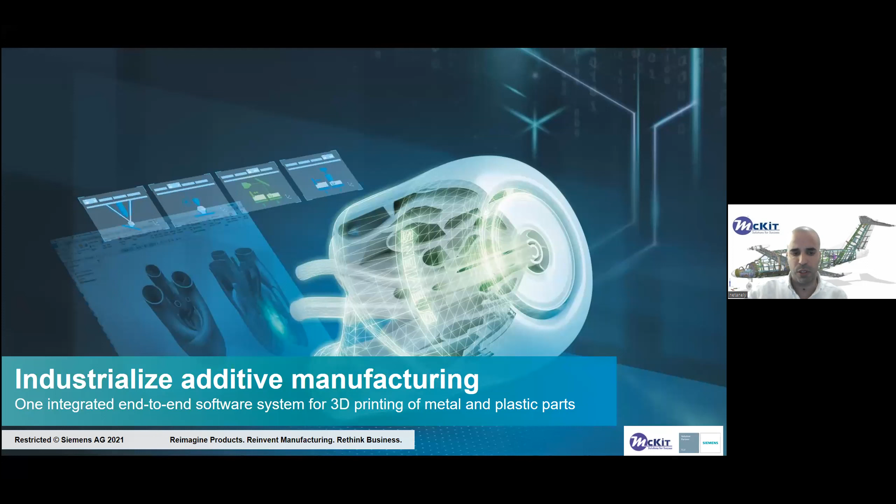This is a real solution that takes place in one system end-to-end. It starts with design for additive manufacturing, continues with simulation for additive manufacturing, and ends with the production of the additive manufacturing at a lot of machines. We will see it.

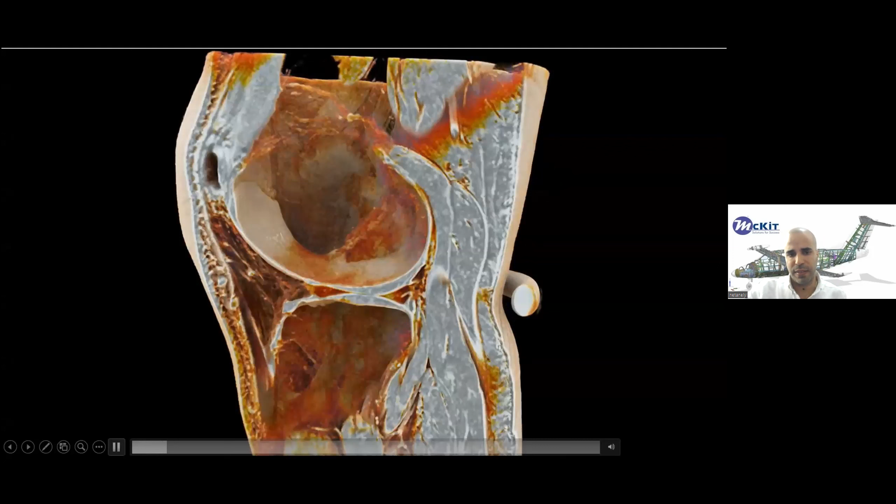I want to start with a simple use case that shows the capabilities, how we start. I'll stop it for a minute. How we start to get the data, how we deal with the data, and how we can prepare it for simulation, prepare it for the additive process, and how we produce it. I want to start with this, and then go to the agenda, and we will continue.

So what we are seeing now is a bone that was scanned and brought into NX. This is the bone, and this part was designed in NX. This will need some fixture on the bone, probably titanium.

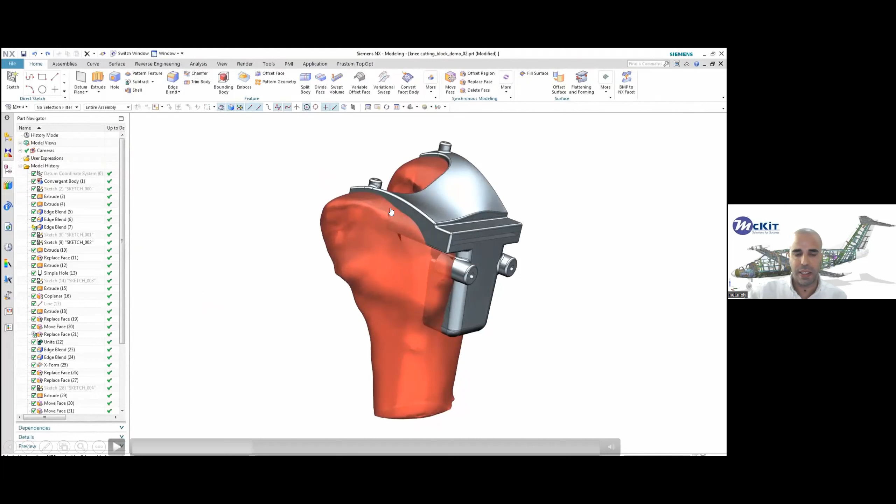In a few seconds you will see that NX naturally performs operations with scan data. This is scan data that doesn't go through any reverse engineering process. With a click of a button in the system, we will see what happens here. This is called convergent technology, and we will discuss it.

The operation you saw is a Boolean operation called subtract. With a mouse click, we perform subtract from the scanned bone, which came in as STL and some other formats. With a mouse click, the subtract happens.

Now we can see the continuation of the process. We are putting the part on the build. If we need to generate support, this can also be achieved within NX - a right click and we generate the support. In this specific case, we also call this the EOS print, printing titanium.

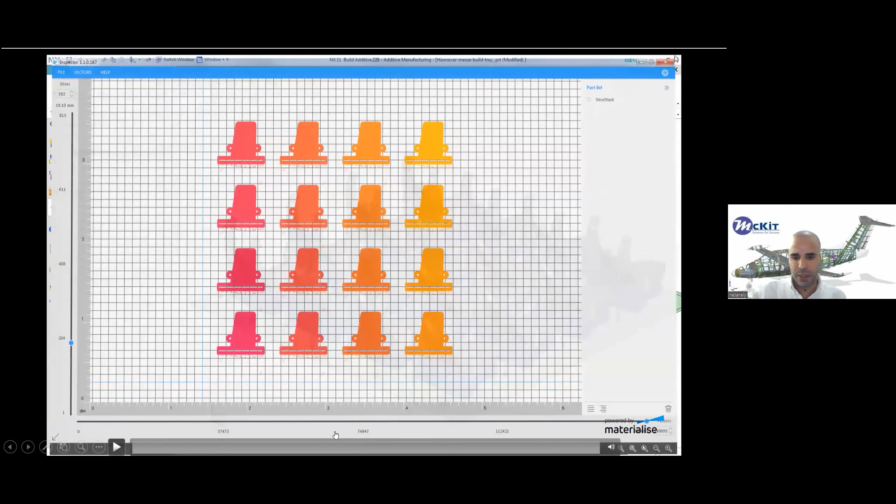We can see that we can review each layer and check for issues, then go to print. So what you saw here was a full process that starts in NX and ends in NX.

So this is the agenda for today, what I've prepared. If you're interested after the session in more details, for a deeper dive on any topic here, feel free to call me through Gershon or directly, and we can do this deep dive.

We will talk about the challenges and barriers we see in additive technology. We will see the industrial additive manufacturing solution, the Siemens solution. We will go through the design for additive manufacturing tools and capabilities that Siemens proposes. Then we will go to the second level, simulation for additive manufacturing, and finalize with 3D printing itself - how to prepare the build, do 2D and 3D nesting, and how to build the support. This is the agenda for today.

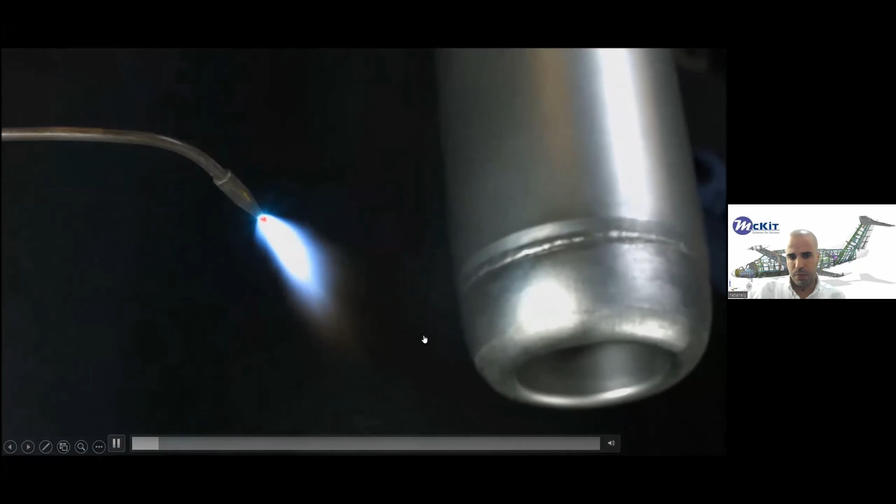I also want to share this movie with you. In this movie, we can see metal parts, metal components that go through a very harsh warm process. Meanwhile, in parallel, we can see small parts with the same material that also go through the same heat process. We see that the small part gets red, while the component with the same material doesn't get warm.

How is this process achieved? You can see this in the project. I talked with Gershon, and Gershon said: present a problem and then present the solution. So this is one of the projects that can be discussed.

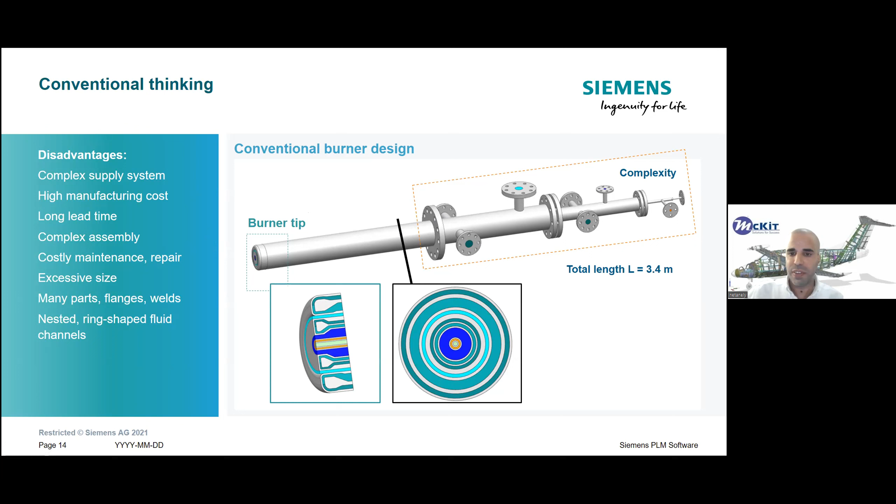The problem here is that the conventional thinking of the system is a very complex assembly. The production of this assembly is very hard - you need to weld parts, produce every part on its own, do an assembly, do a weldment process. This whole chain takes a lot of time and a lot of place, and it's also a very large system.

What Siemens provides here is a new way of thinking - moving from conventional thinking, conventional manufacturing process, to a new process with additive manufacturing.

Perform simulation of flow like you see here, simulation of topology optimization, simulation of design space, and then you can go and seek for the optimized component. As you saw, Jack is putting his hand on the material after a few seconds and it doesn't get burned.

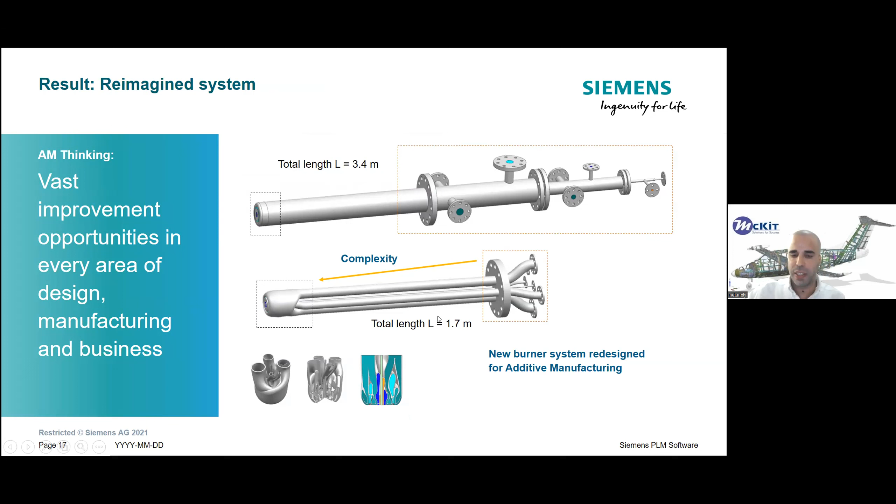So this is the end. In the end, you can see this was the dimension before, and this is the dimension after. And of course, we have reduced in weight, we have reduced in lead time, we have reduced in weld process, and we accelerate everything in every area.

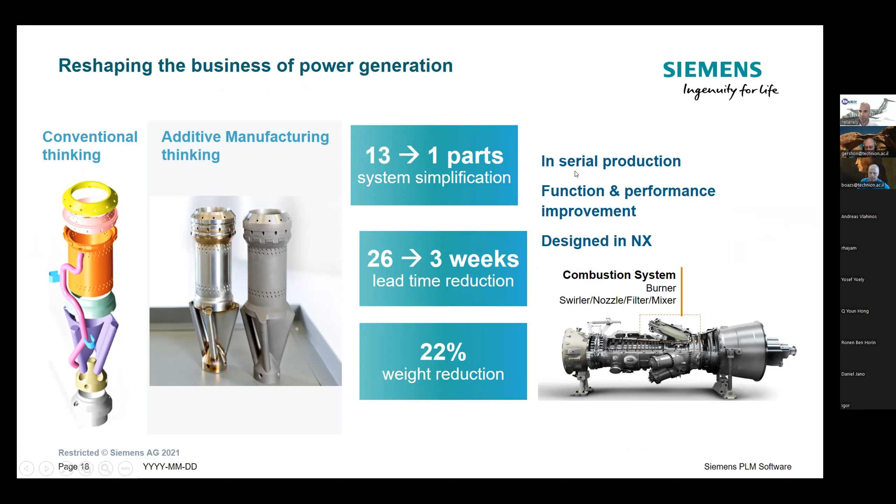What you are seeing here is a serial production. It's not some prototype or a fixture and so on. It's a real product that is in serial production. And of course, as we say, the overall function and performance was improved, and all of this was designed in NX.

Okay, so if we are talking about additive manufacturing and what is driving it, we can say it's about these two vectors. The first vector is the Y direction. We need to reimagine products. We need to think new, and don't think about technology that gets us to think as we thought until now.

We can scan to product, and this is the first movie we started with. And of course, we can expand the performance with simulation capabilities. And of course, the cycle of development within the production is getting very small.

Also, the manufacturing. If we are speaking about additive manufacturing, we eliminate the old processes like molding, like casting, and of course the cost of tooling for this process that costs a lot, and the NRE that we need to invest, it's very high. This process we eliminate if we are thinking about additive manufacturing. Also, we eliminate and simplify the assembly process, as you saw in the example that I showed before.

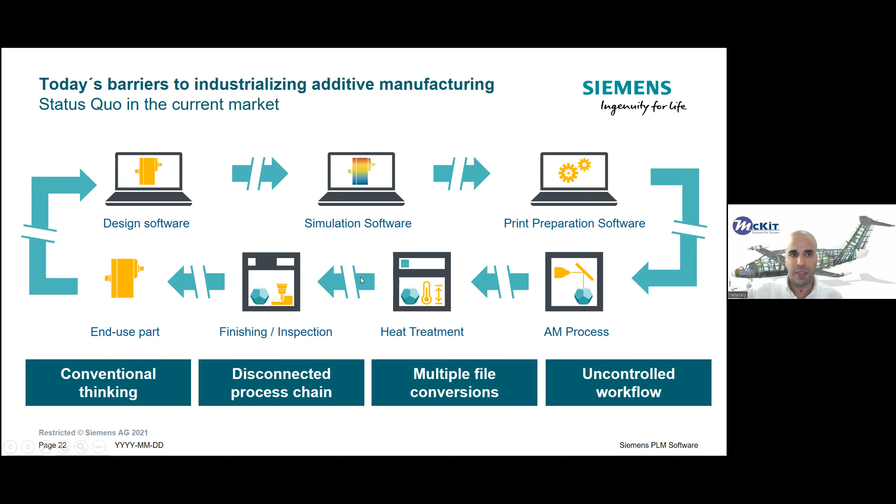And also, if we are not losing data, we are losing the ability to act fast for changes. So if the design changes, this whole process needs to take place with these several systems, and the whole chain starts from scratch. So for example, if I transfer a new design to the simulation software, you will need to do the meshing again, you will need to do all its capabilities from scratch. So this is one barrier that we are seeing.

The second is related to the additive manufacturing process itself, and these are the challenges. The challenge is to get accuracy in the printing. The challenges are recoater collision that we are seeing on the shop floor, local overheating of parts, build failure, of course, building effective support. How do you know in advance that the support you build is effective, and also how to distinguish ahead of time microstructure and defects in the parts. So these are the barriers that we're seeing.

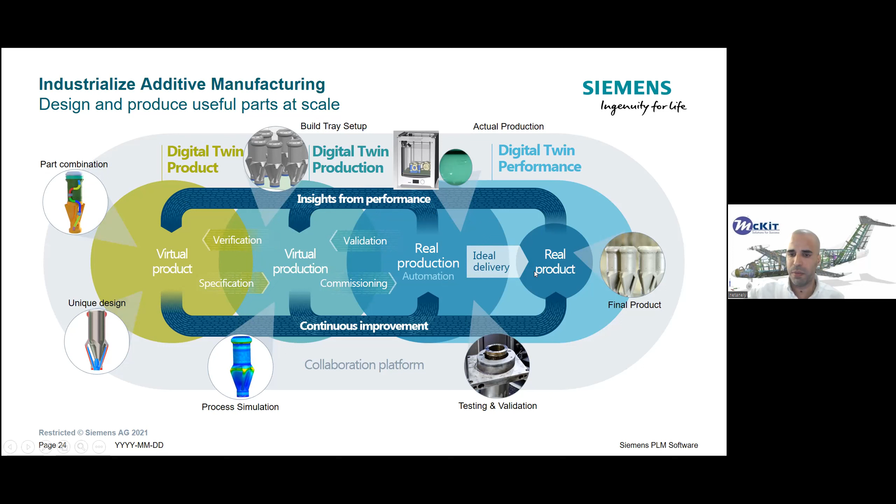What Siemens is suggesting as a solution for these barriers and challenges is digital twin thinking, the digital twin solution. That means in general that we are building a digital twin for the physical twin. The physical twin is here at the right, and the digital twin is at the left. So we are starting at the CAD, we are going to the CAE capabilities, and after we are very satisfied with the process and the phases, we can do a real and strong handshake with the shop floor and deliver products that can be printed with first-time accuracy.

Siemens does it with the leaders of the additive manufacturing community, like DMG Mori, HP, EOS, Electroimpact, Stratasys, Trumpf, of course, Materialise, and so on. Siemens is also building a hub. If we have time at the end, I will also show you something that Siemens has been working on very hard over the last few years.

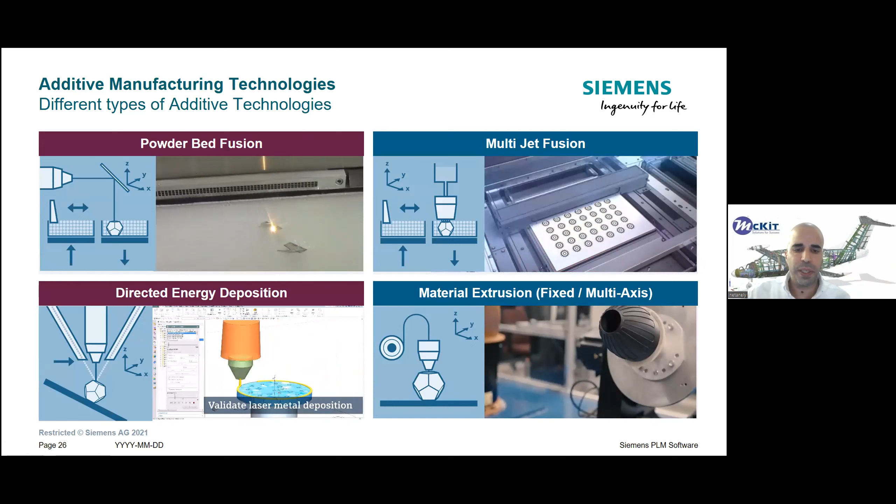Okay, and the main technology that we are supporting is of course powder bed fusion. We also call it printing in 3 axis. Also the multi-jet fusion that you are seeing here on the top is a 3 axis technology. So we are supporting this technology. And at the bottom of the screen, you can see 5 axis printing, like directed energy deposition, and also material extrusion. As you see here, it's also a 5 axis solution. All can be achieved from one system end-to-end. Okay, I will skip this and dive into the first layer that I want to present.

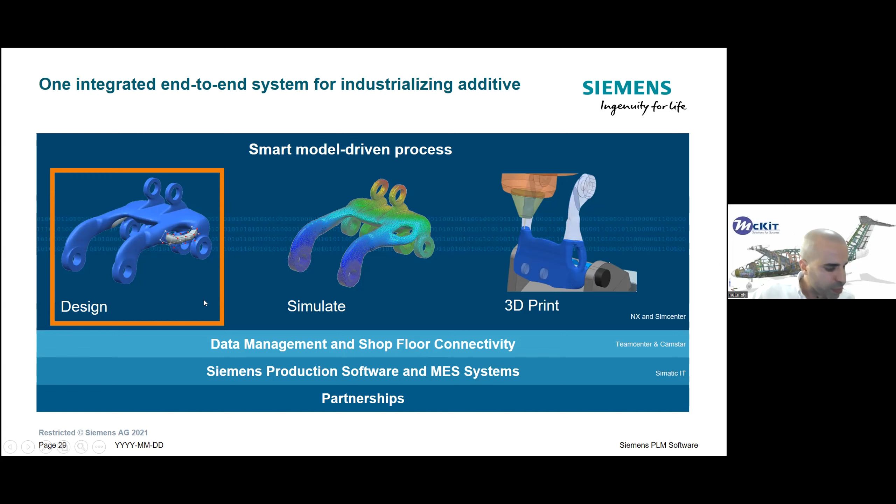As I said, we are suggesting a full end-to-end solution from the design through the simulation to the 3D printing. And this is what we are going to see. What are the tools that help us achieve these goals? From the design aspect, we have a lot of tools to import and do the preparation, so they can help us print watertight parts at the end of the day that will print well. The second is design with convergent modeling. I will present the convergent modeling technology, a trademark of Siemens, and explain what it means. Of course, lattice structures, what we can do with lattice structures in NX, and also optimizing lattice structures.

The next will be design rules for manufacturability: how we can check that the parts we designed for 3D printing can be produced. And we will also see the capabilities to use topology optimization in NX. I will focus on topology optimization for the mechanical designer. We also have capabilities for the simulation engineer, but we will focus on the mechanical engineer aspects.

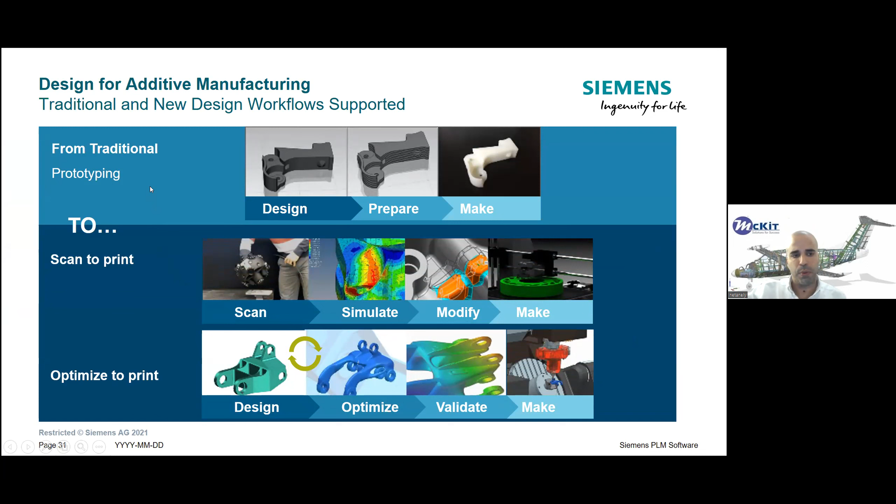So before we dive in, just to know that we support the whole workflow for printing, starting from prototype, where you have a simple design, you want to prepare it for printing, and you print it. The second process is what we call scan to print, which I started with at the beginning of the presentation. We can scan parts, import them into NX, take them to simulation, modify them very quickly, and also prepare them for printing and print them.

And the last workflow is where we take parts that today are designed with conventional thinking, like we saw at the beginning of the presentation, and optimize them so they will be more lightweight from a mass standpoint, and also more robust for the process. So we support all these workflows in the 3D printing area.

Okay, so if we are looking at the first tools, the set of tools that can help us to import and prepare parts for 3D printing, we are speaking about capabilities of NX to work directly with geometry from legacy systems. We can read topology optimization from other systems. We can read CAE or scan data.

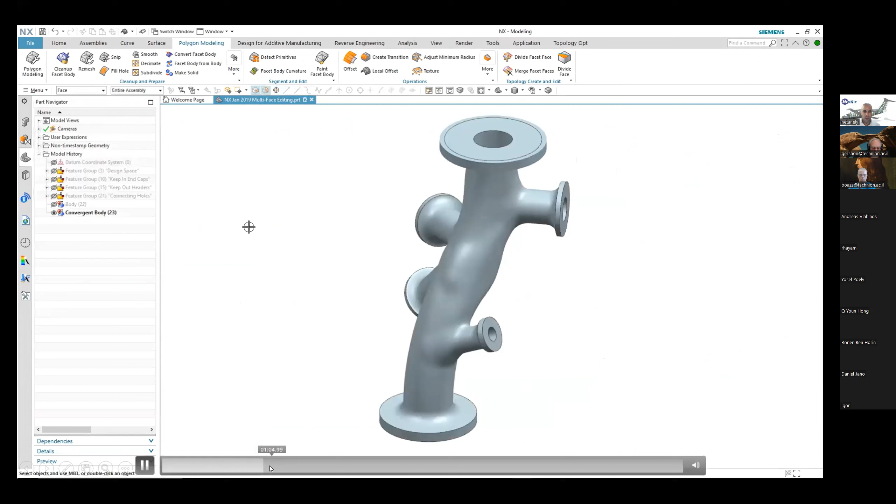And I will make the movie go faster, and you can see very fast changes to mesh data. So this is what you see here. It's polygon modeling. We are inside of NX. We get something like STL.

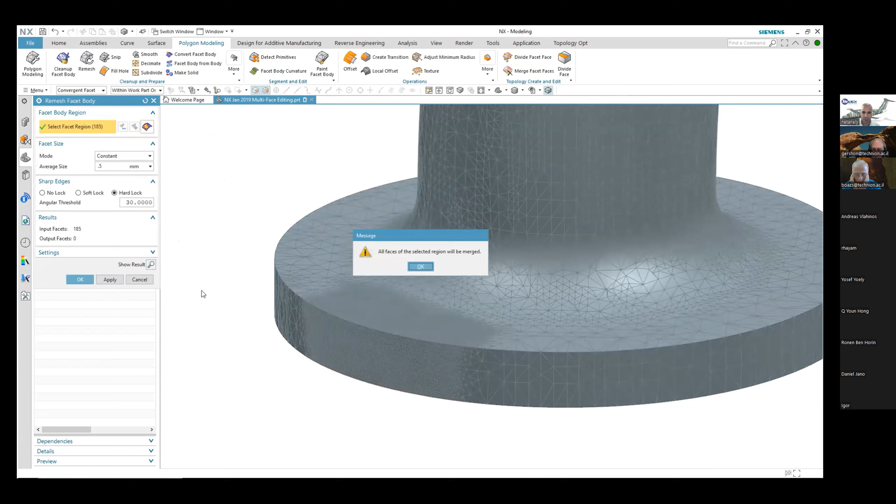And for example, if we do a remesh, take this whole area. This area is maybe more important or less important. We can control the triangles. And for example, here we want to say that this area is more important, and we want to remesh it to finer elements. And as you see, click a button, and everything is fixed.

Okay, another capability in the same concept is to divide face. Again, select an area. You can use the brush. This here is a rough brush, and you can say this area I want to divide because this area is important, and I want to close it with surfacing, do a NURBS surface, and so on. And then you see the face is divided.

We are working on a convergent body. When we are getting a part, STL or OBJ or something like that into NX, we are doing a transformation to a convergent body. And now, you can see, we can simply do holes. Holes are a native operation of every CAD system, and also of NX, of course. But what you are seeing here, I want you to understand it: we're doing a native operation from the CAD system, from NX, on non-native data and mesh data, very easily, as you see here. It's thanks to the convergent modeling technology.

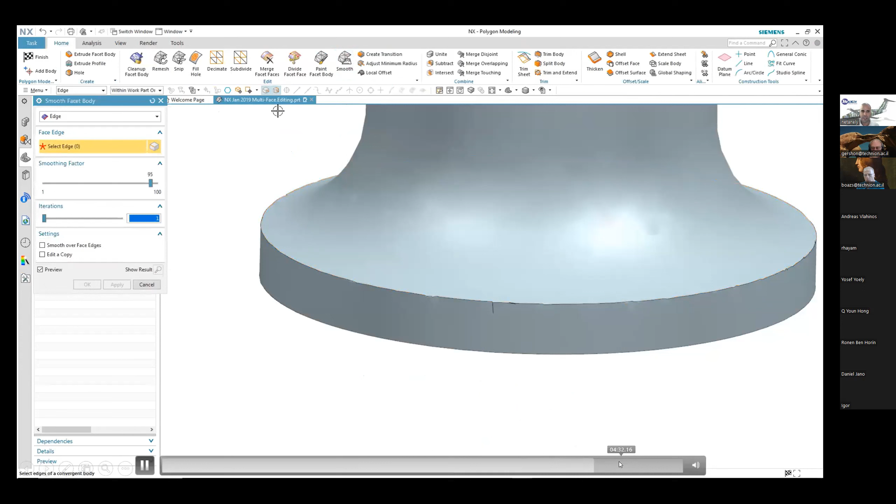Okay, this is direct editing, and I think you understand the point that we can very fast fix data that came from other systems or from within NX. Another capability I want to show you, this is also a new capability. We can take 2D data. What you are seeing here is 2D data spread on a UV grid, and we implement it on 3D data. So we tell the system, take this 2D data, put it here, please. You can see on what surface the system is doing it, and do an offset for us.

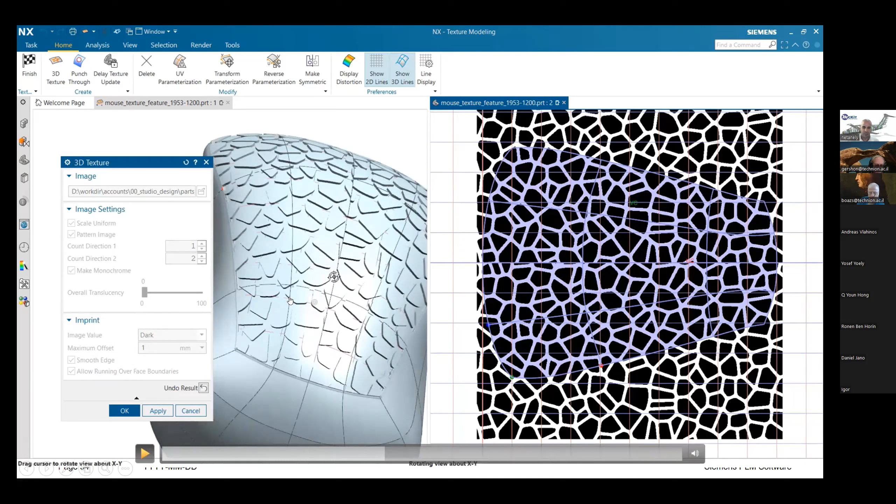In this example, 1 millimeter, and the system will complete it. Okay, I also will run it. I want to show all of the most important capabilities. Another capability is to define and to validate the data that we get.

For example, we get data, we get the scans, it's STL. We are running a simple check here, telling the system, please find us what is not good with the scan. And we're getting it with a visual notification. So we can take this geometry, we can run a plug leakage test, and ask the system to let us know from where we have leakage.

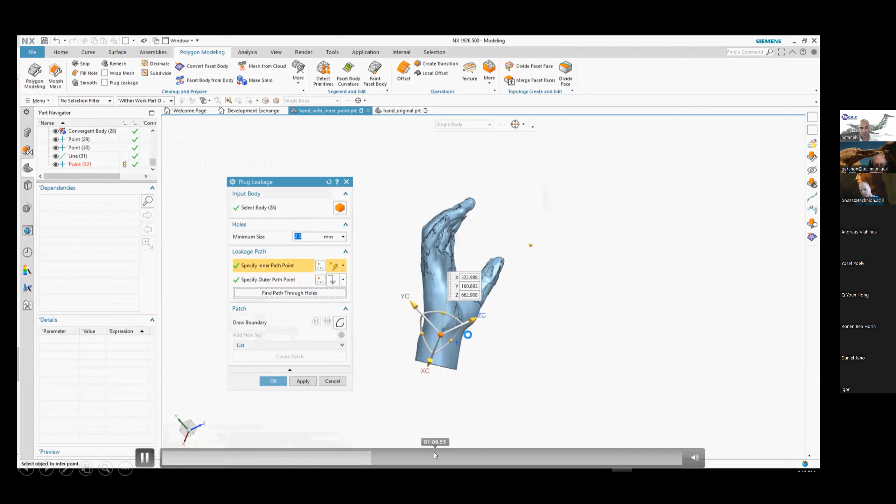So the system will run the analysis. And the system shows us visuals here. You have a leakage. The leakage was defined by 2.5 millimeters. And of course, we can define whatever we want. And on the fly, you can see here the repair. So on the fly, we have the same function, patch. We can do the draw boundary function and very, very easily close these gaps.

Okay, of course we can do the check again, the plug leakage, and see if we have another leakage, and if not, we can go to production or continue with the part to the next level.

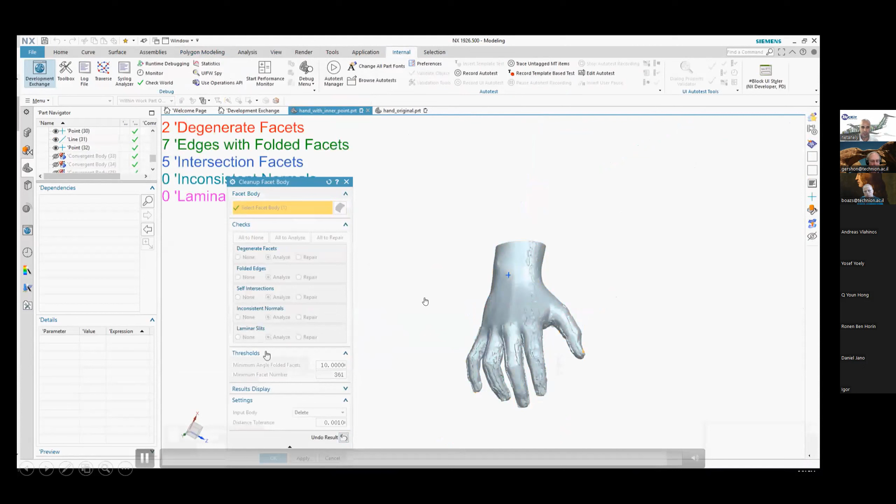Okay, the next topic I want to discuss with you is the convergent modeling technique of Siemens. Convergent modeling, as you saw from the previous slide and movie, has the ability to work directly with faceted surfaces. Also, we now have the capability to combine faceted bodies with precise geometry, as you saw here.

Why do we need these capabilities? Because this area, for example, is a very precise area that after the printing needs to go for machining and get an accurate tolerance. So after the printing, we will take it to machining. If this whole body was a mesh, we would have a problem doing the machining here.

So in advance, Siemens gives us the capabilities from the topology optimization, which you will see in a few seconds, to generate these parts that involve mesh scans and precise geometry. And as you saw earlier, we can also take this convergent body and do a Boolean operation like subtract. We can do a Boolean operation of unite.

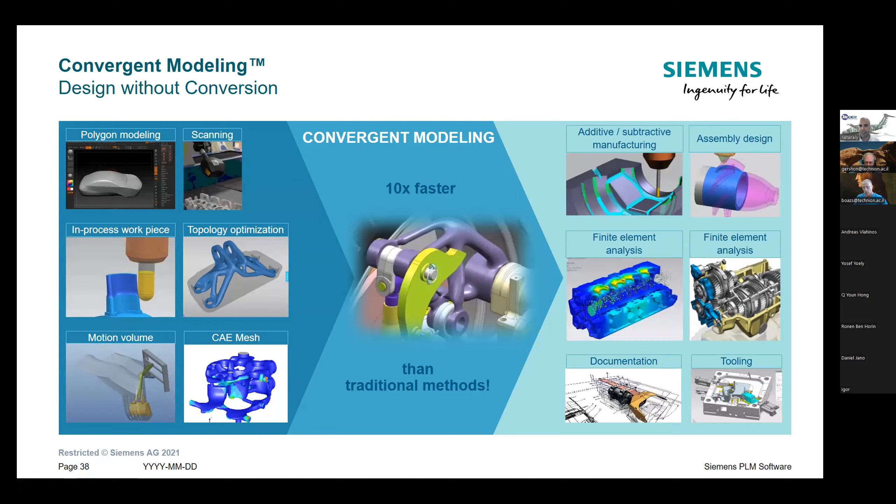And what is also important to understand is that we can take the result of the convergent bodies and continue with them to the next steps, like simulation, finite element analysis, assembly, tooling, documentation, drawings, and so on, and motion volume capabilities. This technology is implemented very deeply in all Siemens products. And of course, if you want, you can export it by STEP 242 and get it to any other system.

Okay, so I want to show here one more example of how we deal with this convergent body. This convergent body also came from a topology optimization. Maybe the topology optimization wasn't so refined in this area, and the designer wants to take this area and make it finer, more robust. In a few clicks he is doing his design, using an advanced capability of NX called Realize Shape. He can control the geometry, like you see here with the cage.

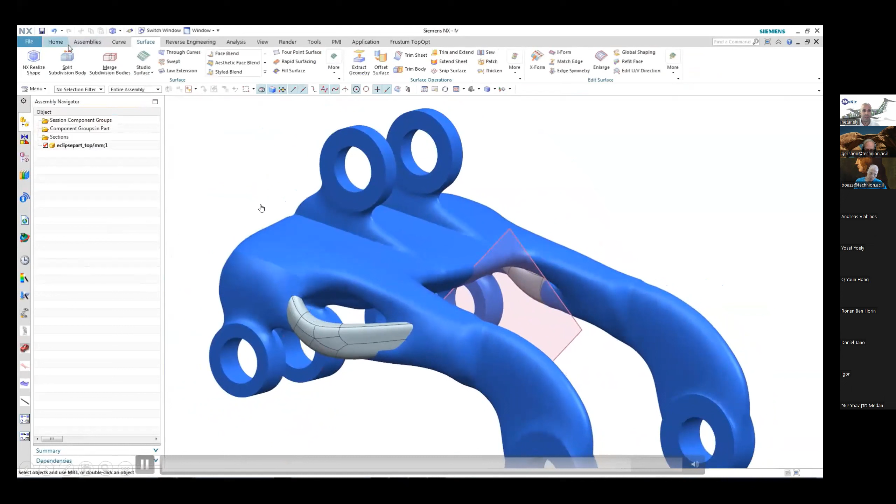And after he is satisfied with the design, now we can say very quickly, please unite the convergent body to the design that I made, and he has a new design. Again, without reverse engineering. Without reverse engineering, this can proceed to the next stage.

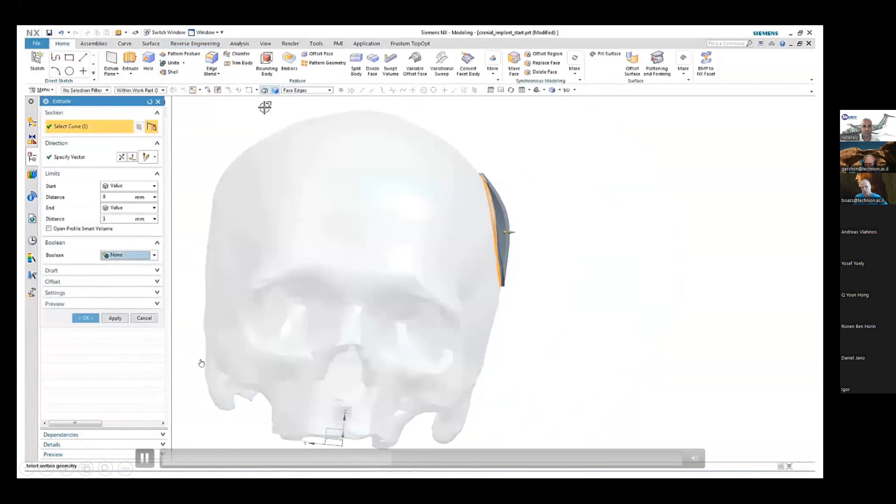Another example of a convergent body is this example that was also scanned and brought into NX, and you can very quickly do a patch on this area and continue working with, again, native NX tools like extrude, like remove material, very fast. And of course, everything is associative during the whole process chain within the CAD, the CAE, and the CAM. Okay.

The next topic that I want to speak about today is the lattice capabilities within NX. Lattice is used for lightweight components and also for structural integrity. So we are seeing these lattice capabilities, with 3D printing, taking more place and more account. We can do complex geometry and replace areas that are not functional with lattice very quickly. So this is the problem. Okay, yes, to get a more lightweight component, and this is achieved with lattice capabilities.

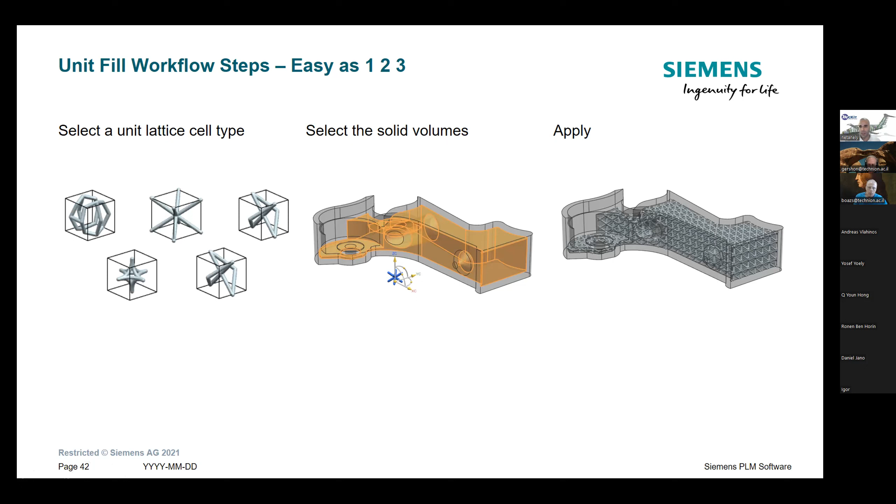In NX, it's very easy. It works like 1, 2, 3. You need to select the unit lattice cell. Second, you need to select the solid volume and apply what you want. Let's see an example. So we call the lattice.

We select the geometry that we want to be filled. This is the function we are calling Unit Lattice Cell. We have something like 15 out-of-the-box lattices defined within NX, but of course we can also create a lattice. I will show you in a few seconds how we can do it in a very complex way. Of course, we can control the randomize, the rod diameter and other aspects.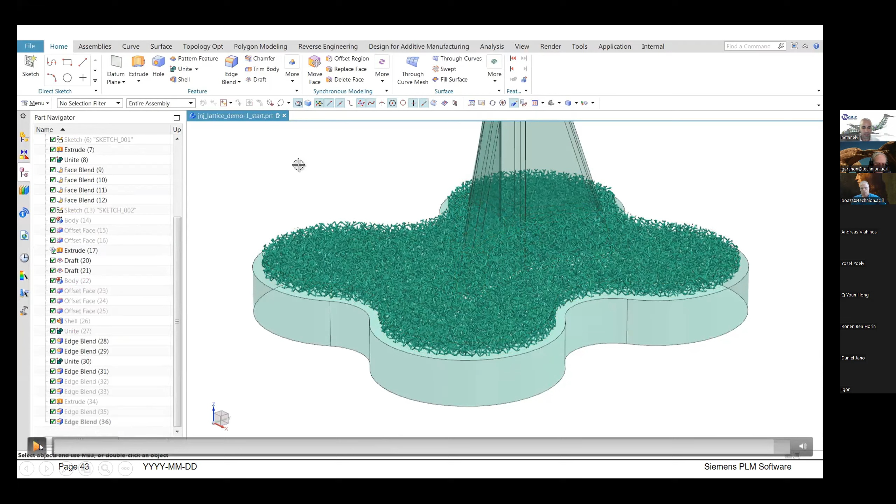What is also important to understand here is that the result of the lattice is also a convergent body. So we can transfer it to manufacturing as separate bodies. NX works natively with multi-bodies. Not every CAD system works natively with multi-bodies; in NX, it's the architecture to work with multi-bodies. So this is one example, and of course you can see a real example from the industry.

I want to show you other capabilities of the lattice. The lattice in NX takes place in two manners: it can take place on a surface, and it can take place on a volume. What you saw in the last movie works on volume. Now we'll see an example of a lattice on a surface. So we select the face, we define the parameters, and we get the lattice.

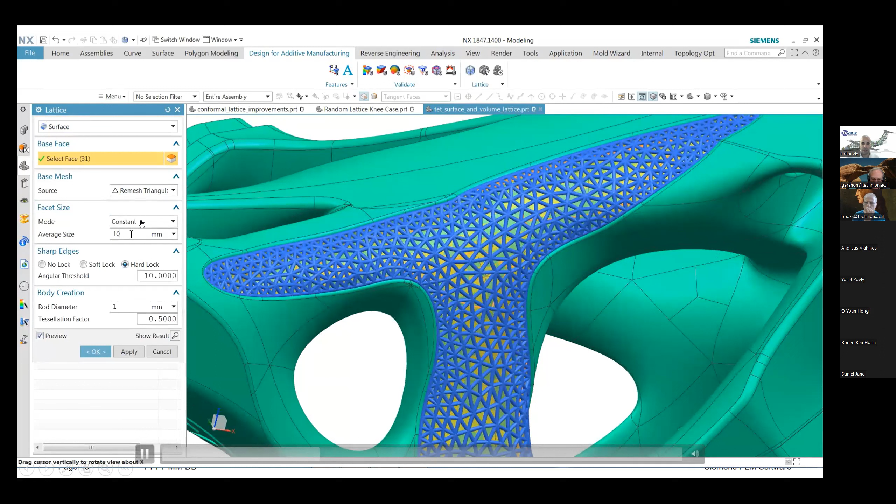If we see that the convergent lattice is not so fine, we can do a simple remesh, and the system will calculate. We can do a constant, we can do a variable, and the system understands the geometry, and according to the geometry, we get answers.

This is a surface lattice, and another capability is to do a tetrahedron fill. This also works on the volume level, and you will see immediately what is happening here. It takes more compute time. What you are seeing here is real compute time with no manipulation of the movie. And this is what we achieved.

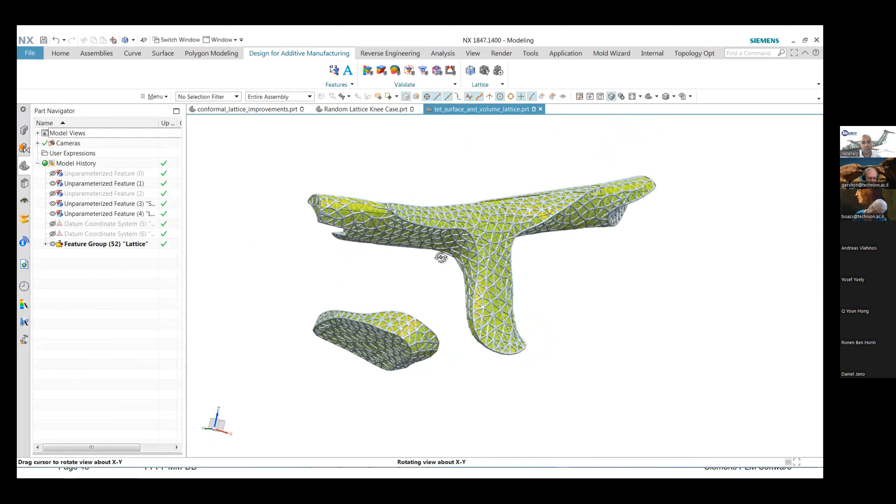Now we will hide the geometry and see only the lattice, the volume lattice, the tetrahedron fill. This is what we get. And of course, as I said, we can leave it as a separate body. It depends on the manufacturer. Mostly manufacturing likes to have it separately because they have a different definition of the lattice. But we can also do a simple unite as you saw before. And this is the result.

A new capability in the last version of NX is optimization of the lattice. It means that as a mechanical engineer I can define a lattice body, a lattice fill unit as I showed earlier, and you can see it here. But I can ask the system to give me the optimized lattice. So this is the beginning, and this is after the optimization. Let's see how it takes place.

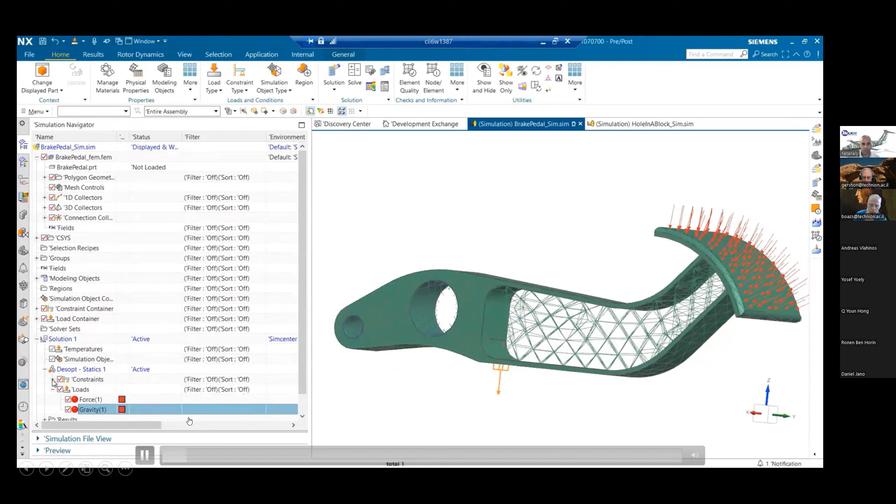A load of 3,000, which is close to 660 pounds, is applied. What you are seeing here is the CAE environment embedded in NX. It's called Simcenter, but it's embedded in NX. These parts came from NX, the lattice was produced in NX, and with a click of a button we go to the CAE environment. Gravity is being applied, and these two are the constraints. We can see the loads and the boundary conditions taking place here and on this part.

Let's see what happened. We have a lattice here in terms of a beam collector, that's the term used in CAE. I can show the diameters by bringing up the mesh display, solid. This is currently a constant diameter lattice. The user can set up optimization and say I want rod diameters between these min and max values. As soon as we do that, the linked file is created in the backend and attached to the case.

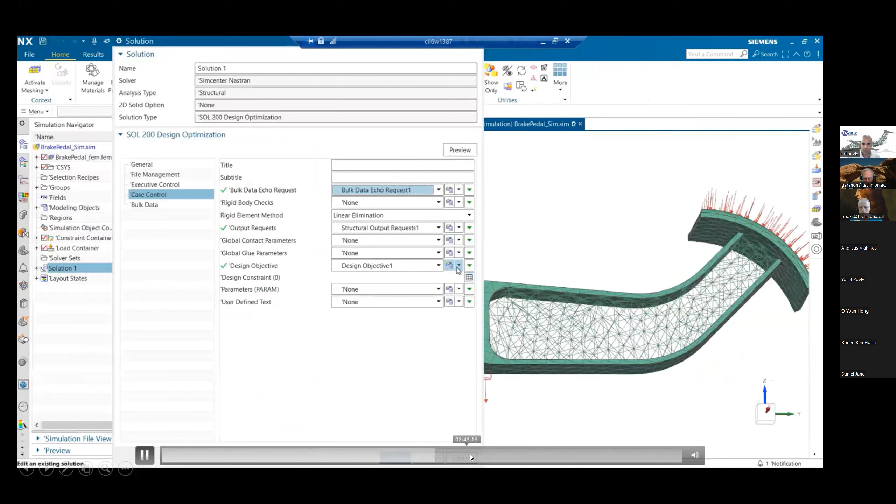I will skip ahead in the movie, beyond showing all the capabilities here. But in the end, I can just say new values, and we did. In the end, what you are seeing here is the optimized lattice that is suitable for this part. So you can define ahead a lattice that you think will be okay, validate it, and the system can give you an optimum. See that the displacement of the surrounding body was within 0.01 variable value. And again it depends at various levels.

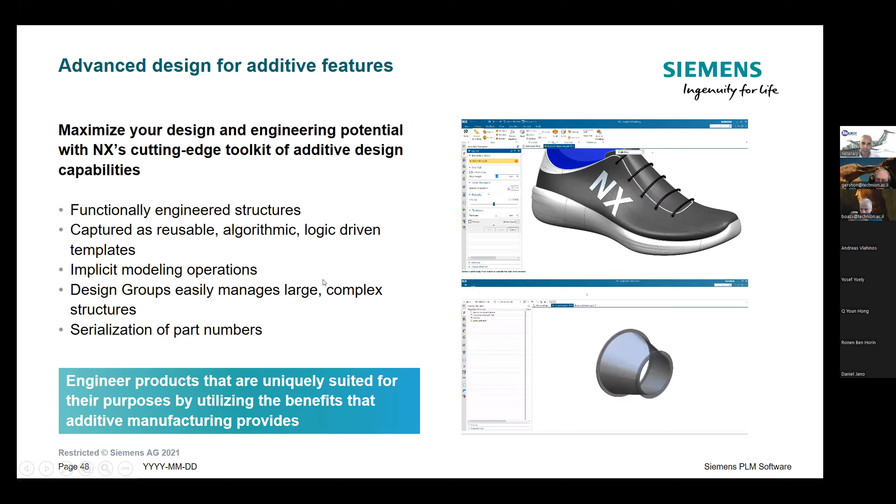Another capability within NX is called NX Implicit Modeling. This capability helps us create TPMS structures like gyroid, Schwarz, diamond, and so on. Let's see a short example. I want you to focus on the mouse clicks needed to take this geometry. Just a second.

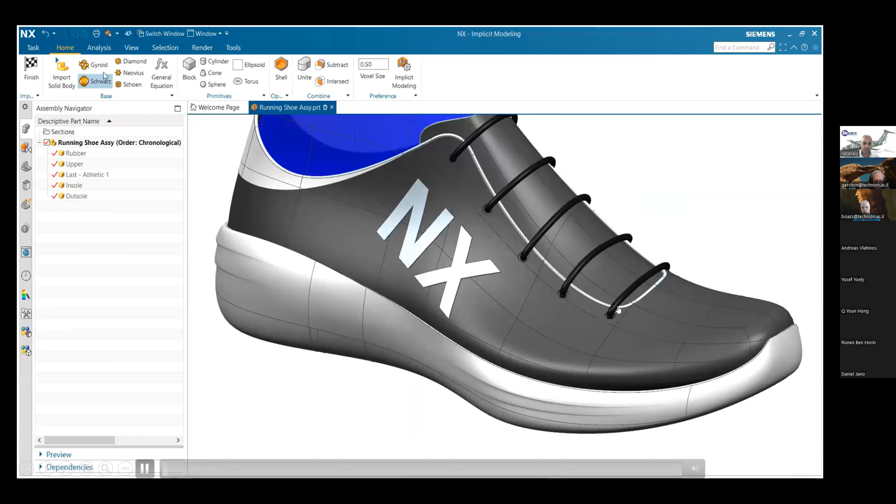So we are selecting the volume that we want in this, and that's it. We have a new geometry with 2 clicks. We took the gyroid. Of course, we can also control the variation of the gyroid and the offset and so on. But with 2 mouse clicks, as you see, we can do a gyroid. Of course, also this can be taken to CAE and analyzed and so on.

So that's it. Of course, we can validate it with native tools. We can do some sections. We can color it. We can do whatever we want. Also, this result is a convergent body. It's a convergent body.

Okay, I will continue. Maybe we do this also with implicit modeling. It's another application. But we can also see the result. Of course, we can control the vectors, we can control everything. At the end of the day, all the things that I show you are functions in NX that are associative, and we can call them back and change them in one click.

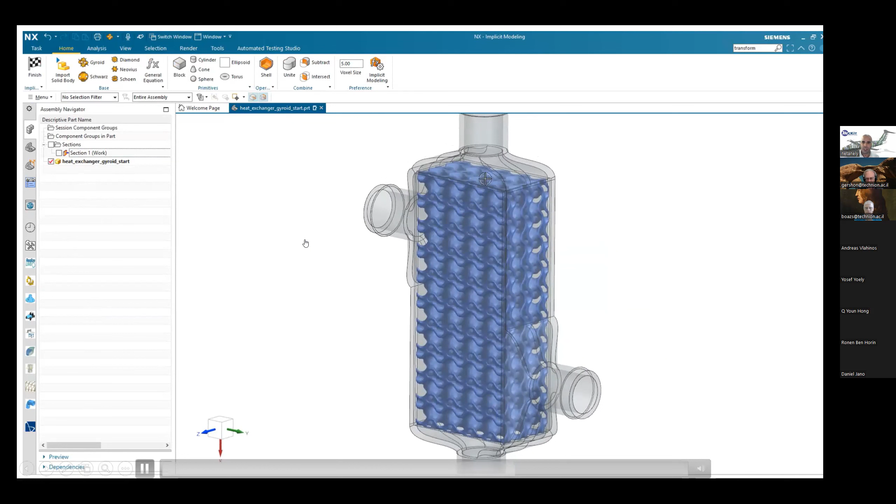Okay, another capability we spoke about before is lattice. As I say, we can.

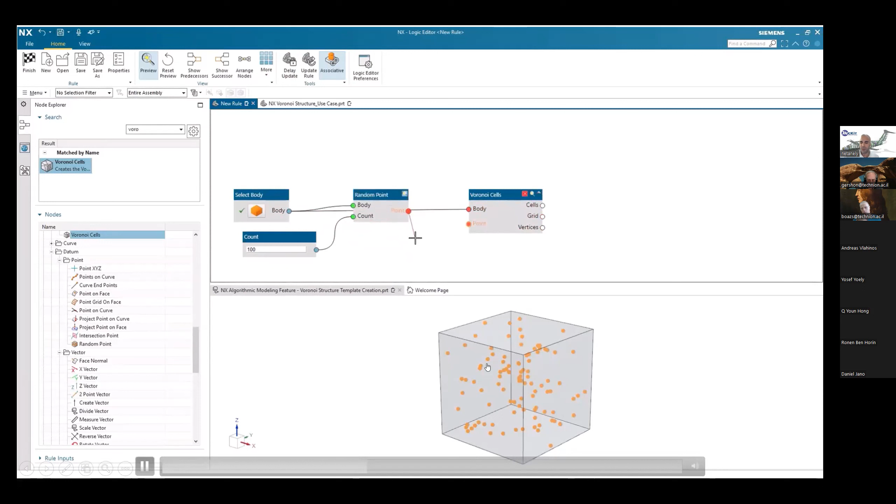Mainly, these capabilities take place with codes like Visual Basic, Python, and so on. Today, we have these capabilities directly in NX, and you don't need to be a programmer to write the code. You can write a code, and the main benefit is that on your screen, you can see at the bottom what is taking place, what is happening. So you are doing the input and output, and I will proceed with the movie.

And with random points, we can see the geometry that we can produce. So what is important to understand here is that we create geometry. At the end of the day, we create a part that can be reused, for example, for Voronoi basic structure. Of course, we can collaborate on it with our teams. And this is what we are seeing here. It became a function in NX. Algorithmic feature, it's a feature. It's an associative feature.

And what you are seeing here is the shoe that we have from before, we can now call this algorithm that we were building before. And we can implement it very, very fast. As you see here at the left corner, Voronoi basic.

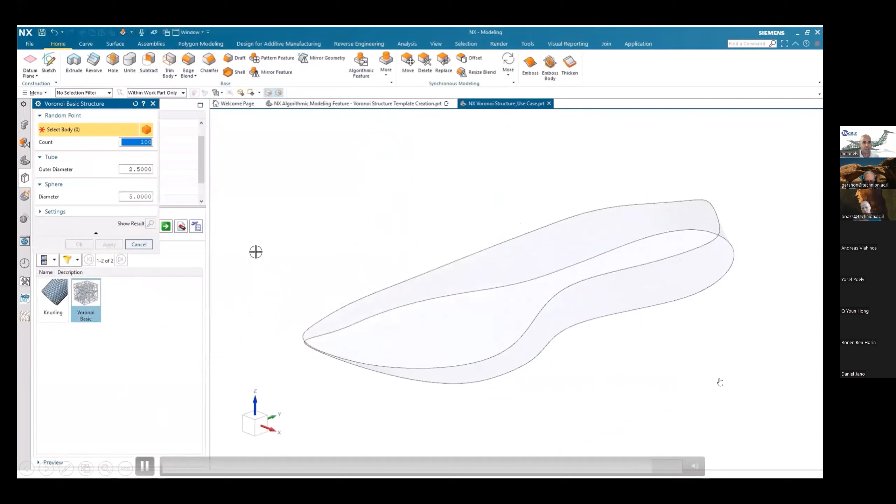We can also add a picture if someone wants. And as you see, this is a function. And we can control the number of points. We can control the tube diameter and so on. And the part is ready. Okay, this is another example.

I want to continue to the next bullet. The next bullet is talking about the validation of the design. We have very strong tools to understand if the design that we made for 3D printing is validated for 3D printing. So for example, we can check the wall thickness and visualize the wall thickness. We can do a check of the overhang angle.

If we are printing metal parts, and not just metal parts, but it's usually on metal parts, we need to do supports. So the system can tell us, according to a work coordinate system, what is the area that will need support. We can also check the printable volume, if our part fits into the printing machine. We can check trapped support.

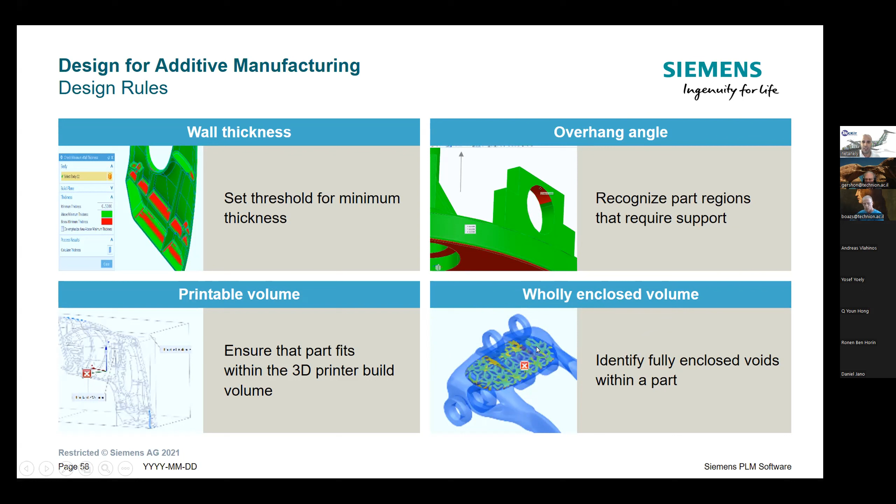We can check the area that is a wholly enclosed volume, where if we are printing with powder bed fusion, we will get powder here that can't get out during the process. So as a designer, we need to think about it ahead. If yes, make a change in the design. If not, think together what to do. So this is the example.

We call a function in NX, for example, here check minimum wall thickness, calculate thickness, and we can visualize the thickness. All the results are captured in a tool in NX that's called HD3D tools, and it is also associative. We can also share it, and so on. Here we do an overhang check.

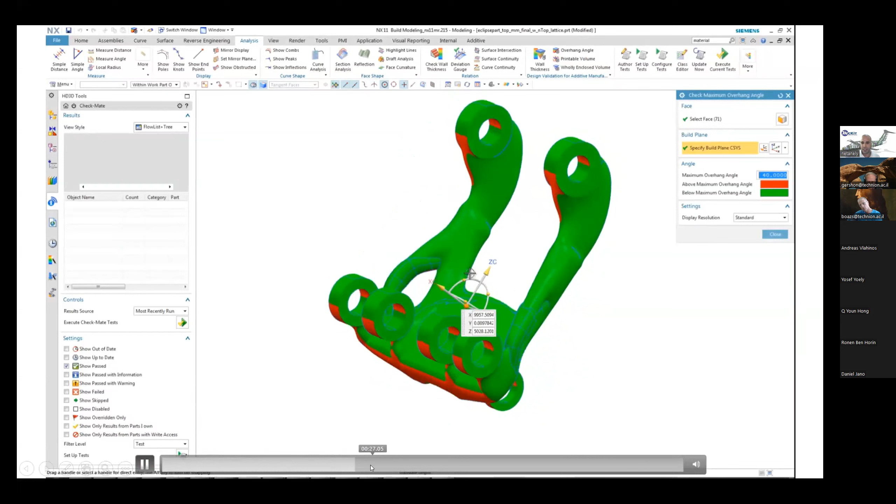All the validation takes place relative to a coordinate system, of course. For the build plane, as you see here, it's a specified build plane coordinate system. And according to this, the system does the calculation. And for every validation like this, if we are happy with the result, the system can also produce a print coordinate system that continues with the process, and manufacturing can use it.

So, check area of fully enclosed volume. Also, again, the result is visualized in green and red, as you see here. A simple check that we can put the part, the component, on the print.

After the orientation completes, you'll see a remark indicating that this is okay.

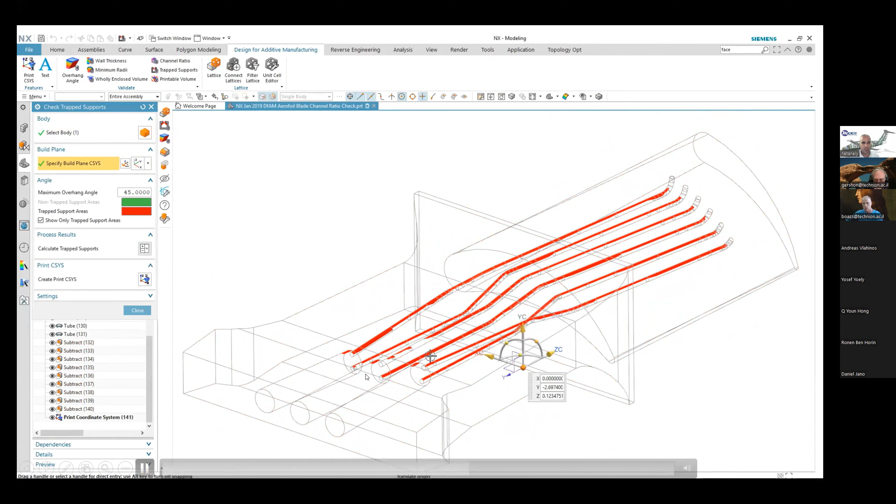We can also define a trapped support, a channel ratio support, and many other types of supports to understand if the design is proper for 3D printing. For this example, we can see this area will be a trapped support given this print coordinate system, so we need to decide what to do—maybe change the build plane, maybe change the holes, and think carefully about what we're doing.

Another capability takes several of the tests we saw before, like surface area, support volume, print time, and overhang, combines them into one function, and tells the system to perform a simple part orientation optimization. The system takes into account surface area, support volume, print time, and so on, and gives us a result telling us the part needs to be in this orientation, depending on what we select as the preferred criteria.

I'll continue with the next topic: design for additive manufacturing and topology optimization. Topology optimization for the mechanical designer in NX is a Siemens capability. The process starts with design space, continues with construction bodies, defining the objective for the optimization, defining the shape we want, and of course defining the loads and constraints, then asking the system to do the optimization. Finally we get the result, which we can validate within the same task environment.

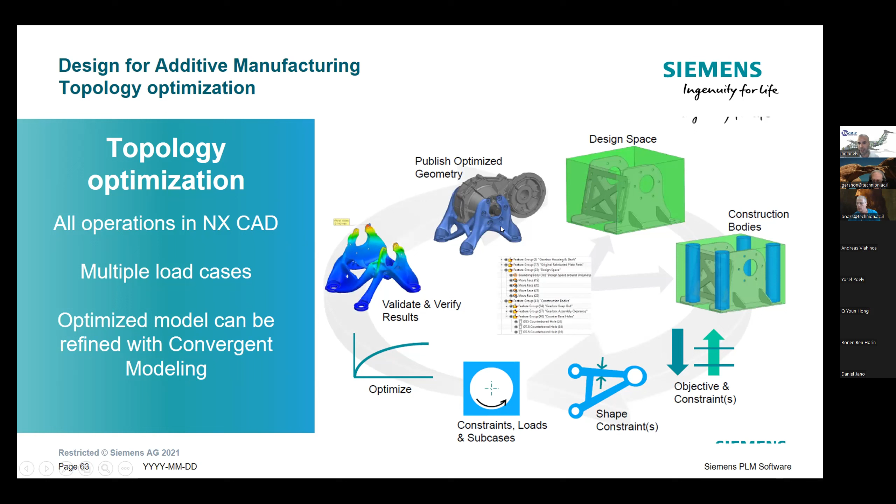The result, as I said before, is also a convergent body with a precise area. Let's see an example from recent months—a very famous example.

Here the problem the engineering system tells us is to take these 13 parts, or something like 11 sheet metal parts, and combine them into one part. Again, we want to reduce the lead time, reduce the cost of the parts, and also reduce the weight of the part. This is the goal.

We start the operation by defining the design space—an area that will help us during the topology optimization—and then go into the topology optimization task environment in NX and start a study.

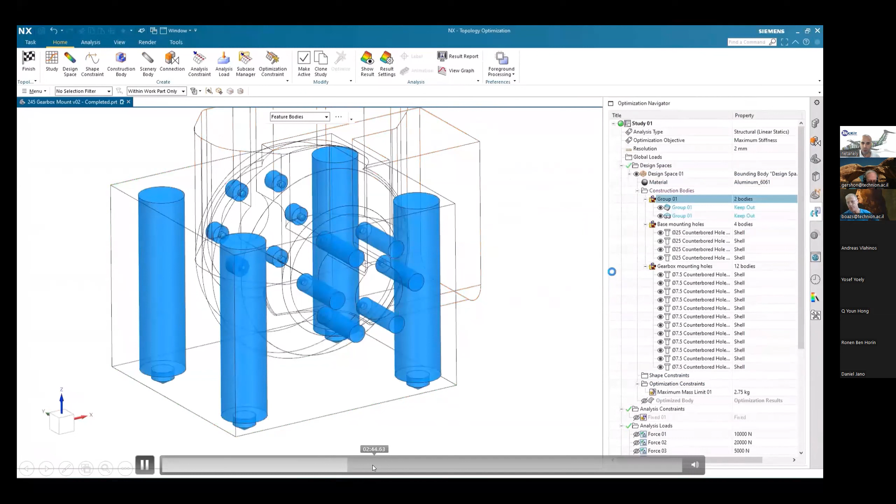The study can be called maximum stiffness, minimum mass, and so on. We have an optimization navigator within NX that controls the design space and the material—we can call an out-of-the-box material or define a new material. We also define the construction bodies: keep-in, keep-out, what the optimization should or shouldn't consider.

If we want a maximum mass limit, we can define it. We can define the constraints and the loads, define the fixed constraint, and define the force at that area.

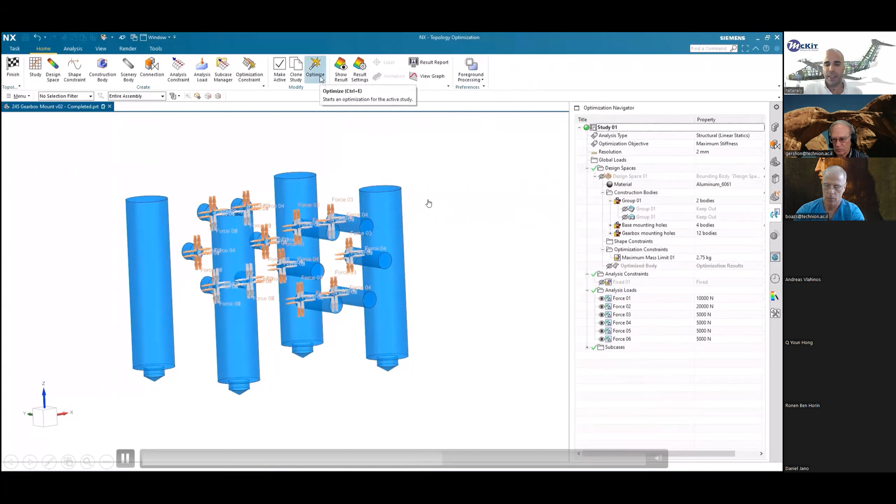And of course this is a requirement of the system—we can also do a subcase manager, so in one study we can get multiple results from different subcases. For example, the first subcase has force going through the z-axis, and the second subcase has it through minus z-axis, and so on.

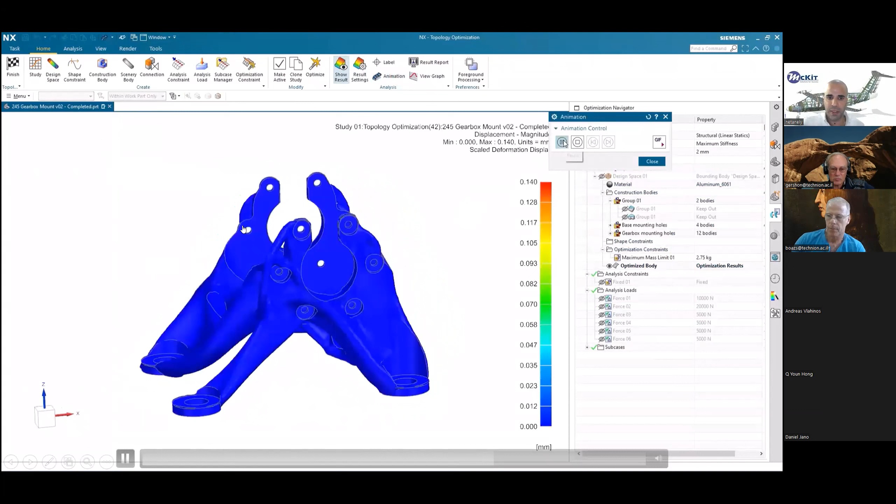I'll continue—you can compare studies and subcases. Again, this is a feature in NX called topology optimization. You can double click, get back into the topology, change a parameter, and quickly do another analysis.

Okay, I will go to the second layer of the solution. The second layer of the solution is speaking about simulation. Of course, we will speak about the simulation of additive manufacturing. So let's see what we have here.

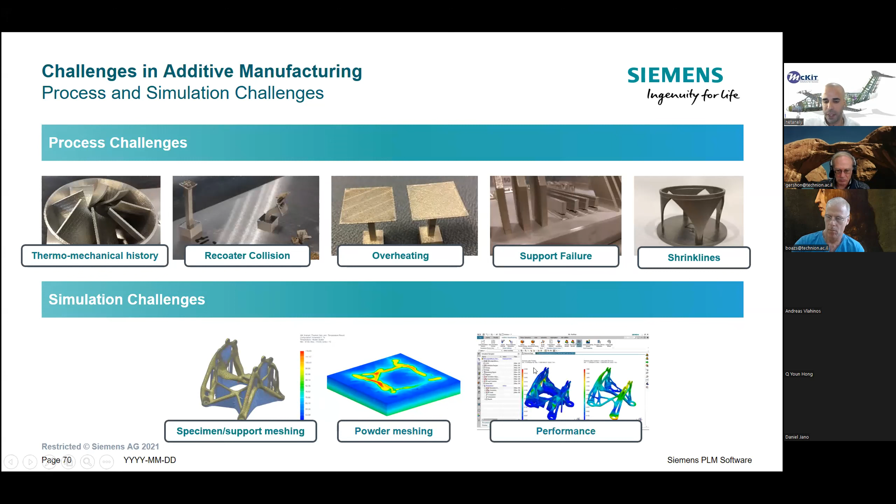We talked at the beginning of the presentation about the challenges we have with recoater collision, overheating, support failure, and so on. Siemens' solution for all these challenges is to do a predefined simulation within the system, within NX. We can also do powder meshing, support meshing, and precise meshing of the geometry to get the result ahead of time, and of course also control the performance.

So here you can see some examples of the powder meshing of the part. What the system is doing is calculating the thermomechanical distortion of the part. The mechanical result you can see here. We can also do a powder simulation, and the system will tell us where we have distortion within the printing.

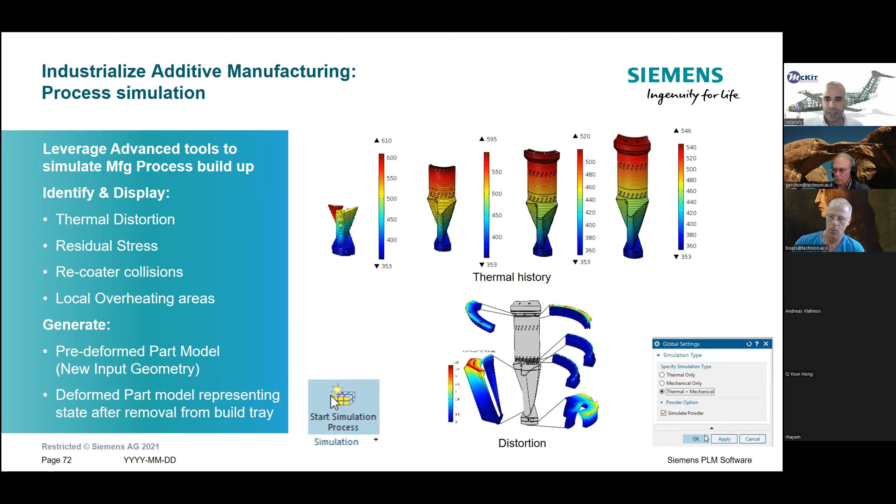At the end of this process, we can predeform the part model, creating a new input geometry. We can tell the system, okay, we understand this is the distortion we'll have, please give us back a calibrated geometry that will print accurately. So we have all these capabilities within NX.

I can show here two short movies. In one click, we go into the simulation process. Here you can see the part, you can see the supports. We are defining a material, of course.

What you're seeing here is a thermal slice. We need to do a thermal slice, we need to do a mechanical slicing, and of course this can also be controlled with several parameters.

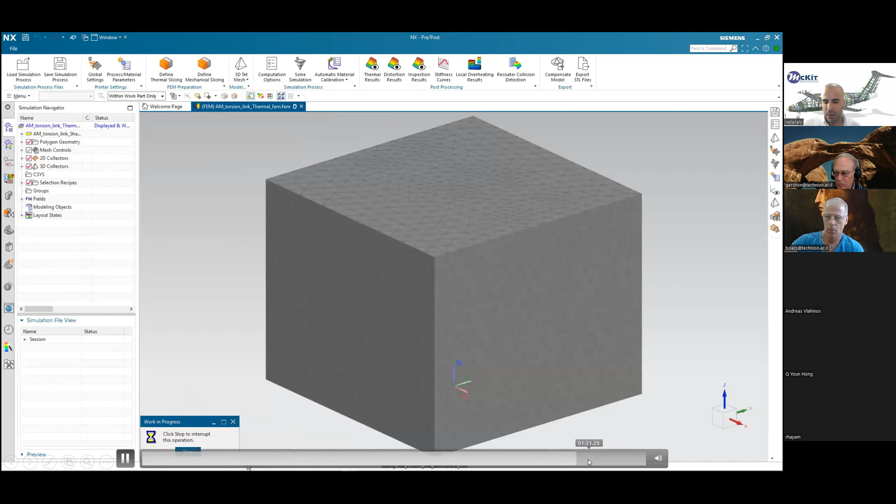We can do a 3D tetrahedral mesh, also thermal and mechanical. What you're seeing here is the meshing of the powder, the meshing of the parts, and the meshing of the supports.

This was the first part of the simulation, the preparation for the simulation. What we see here is the computation — we run it, we call the solver, and this is the result. We get distortion after printing, distortion after printing with the supports, distortion after cool down when we remove the build plate, and this is the result.

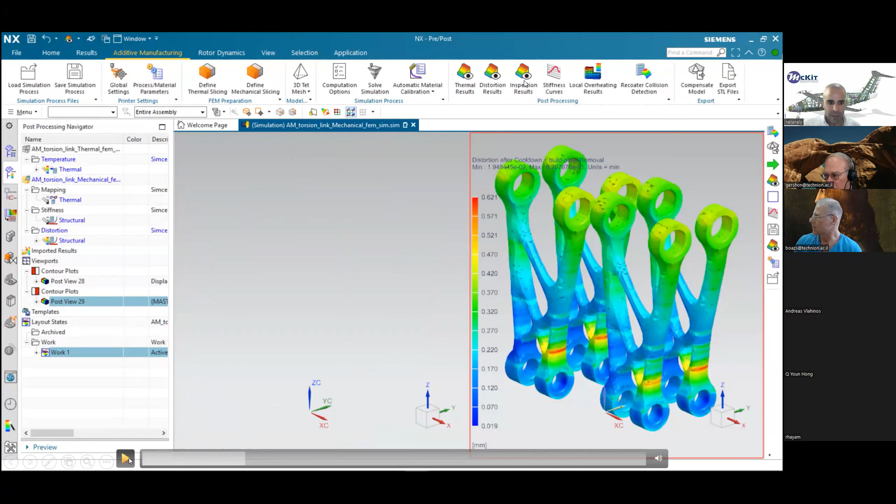We can also see, after printing, after cool down, after support removal, and inspect the result with a visual bar, seeing the thermal result and distortion, doing an inspection. We can check the stiffness curves, local overheating, recoater collision, and do an animation of the build with the powder and without the powder.

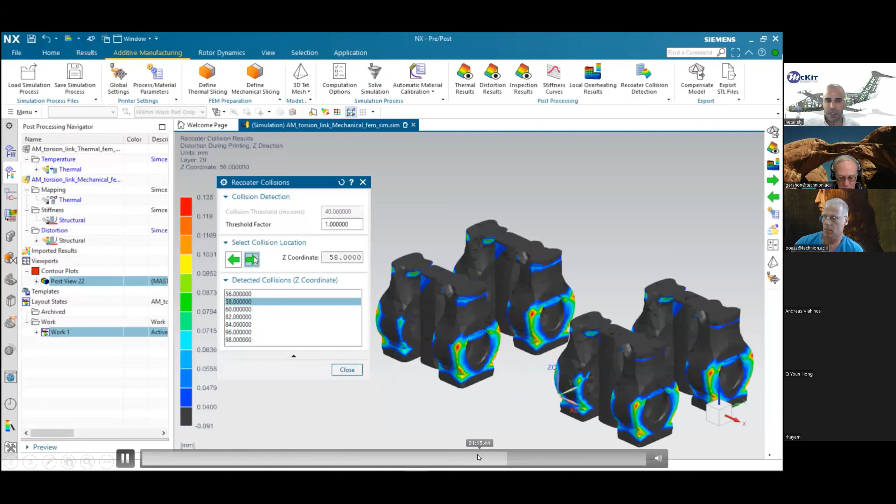The last thing here, we can check the recoater collision. It tells us if we have distortion and in what area we'll have this collision, and maybe stop at the specific layer to do some adjustment.

After everything is computed and we see the result, we can ask for a compensated model, and with this compensated model, we can go for the print.

So this is what I wanted to show you today on simulation for additive manufacturing, and I want to continue to the next step, which is related to 3D printing itself.

The preparation for 3D printing includes putting the parts on the build tray, tray content, orientation of the part, how to do 2D nesting on metal parts, and how to do 3D nesting on polymer parts.

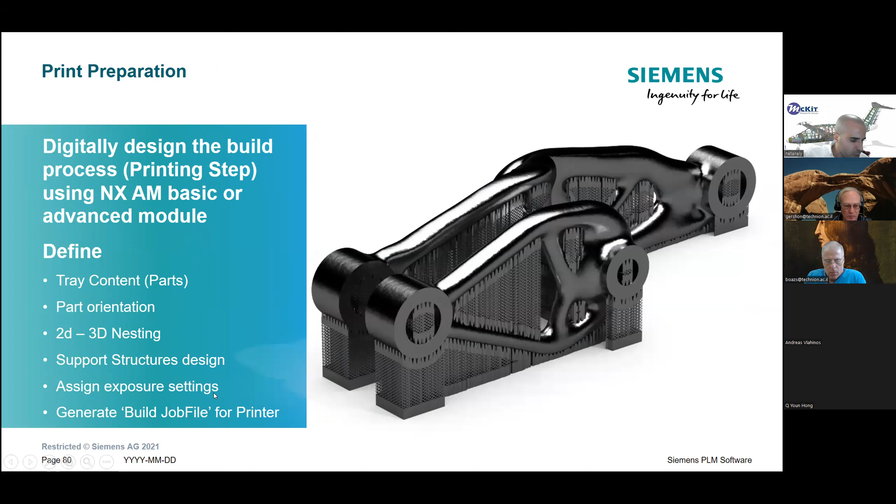And how to build support, how to create the build job, and so on. This was the technology you saw earlier — we spoke about three axes and five axes. Of course, we have the solution for that.

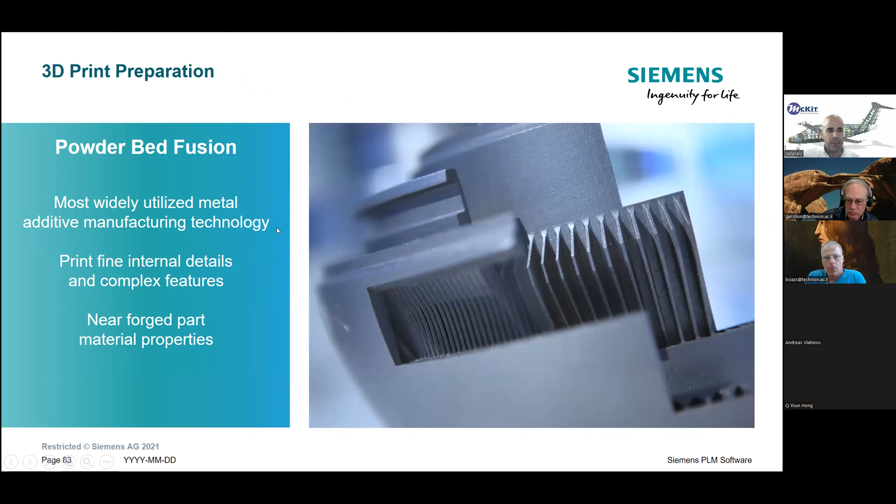Let's speak about the workflow for 3D printing preparation for powder bed fusion. This is the most widely used method across the globe. Let's see some examples of what we have in the area of preparation for the build.

Of course, we can build automatic support like you saw in the movie, by right click, but we can also generate manual support. For example, if we know the automatic support isn't optimized and we want to remove it from one area and build manual support instead, we can do that. We can do several manual supports like block, point, line, and whatever you need.

You can also use user-defined supports, and with user-defined you can use all the capabilities of NX, the CAD capabilities of NX. As you saw before, it's very robust — you can create every support that you want within the user-defined option.

And of course we also have out-of-the-box supports, like hybrid, tree, and other support types that the system can generate very, very quickly.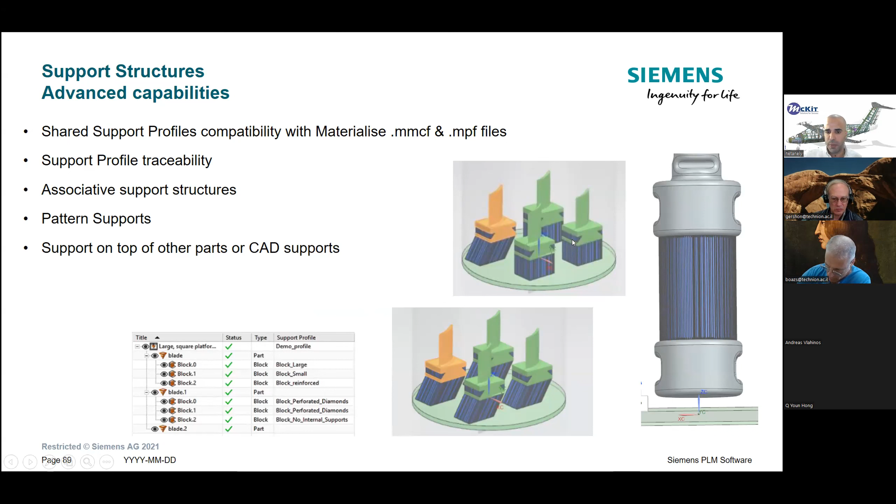As I said, the support is associative, so here you can see a pattern in different use cases. Part instancing and patterning include the support, so you don't need to create support for every part individually. You can take a part, build its support, and do a simple pattern. The patterning types are linear, circular, polygon, spiral, along a curve, and helix, and so on. Generally, patterning is a building block of NX, native to NX, and also available in the 3D printing environment.

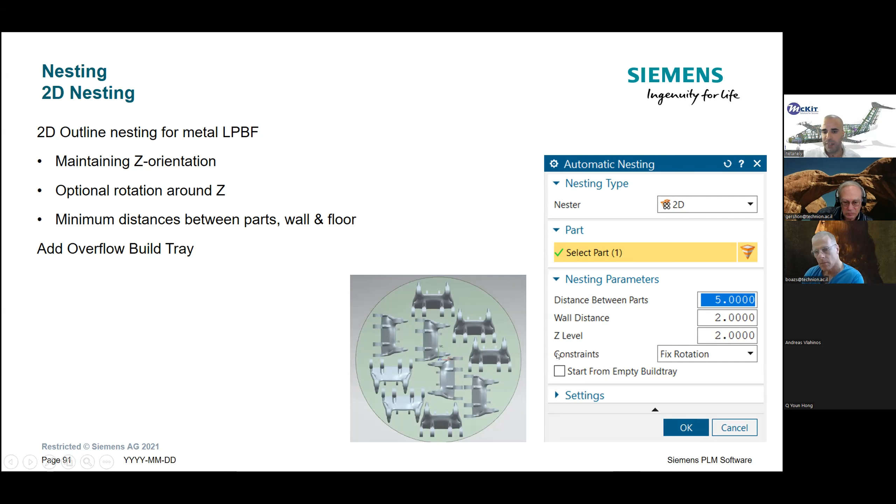For nesting, we can do 2D nesting. We can control the Z orientation, the rotation around the Z axis, and also control the overflow build tray. So if a part gets out of the build area, we can suggest a new overflow build.

If we're speaking about polymer parts, we can do 3D nesting. We tell the system to bring parts into the 3D printing environment, then tell it to do a 3D nesting for a specific printing machine, and NX will perform automatic nesting and give a result.

We also have the capability to do print marks. In industry, this is very important for serial numbers, so you can have traceability and know from which batch each part was produced. We have these abilities inherent in NX. You can do simple text and control the numbers with an Excel sheet, doing only one, and the Excel will generate the print marks automatically.

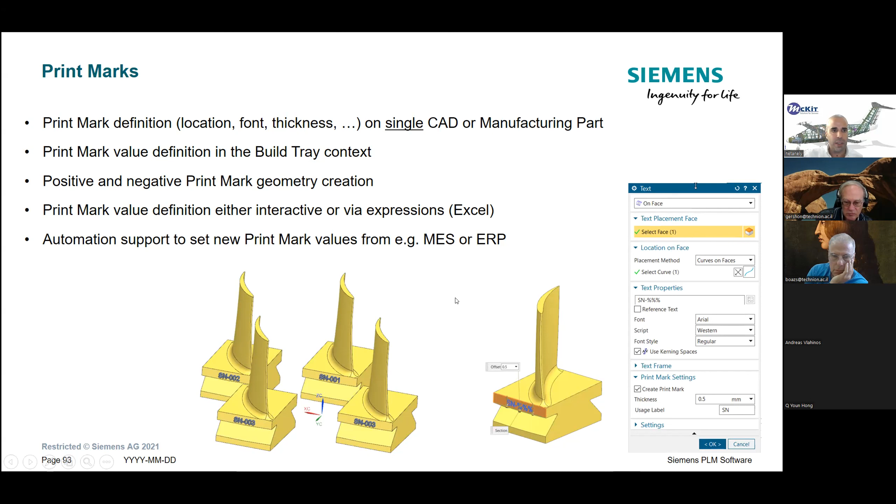Of course, we can call the build strategy and define the material, the layer thickness, and the process settings, like how the laser will work, along with a lot of machine parameters, all within NX.

Taking an overview from the top: we start with the design, as we discussed at the beginning of the presentation, showing the capabilities to perform such design. Once we're happy with the design, we validate it and move it into the 3D printing environment. We need to select the printer, position the part, and if we have several parts, do nesting, create the support, define the build process, verify the laser path, then send it to the machine driver, and finally print the parts.

Let's see an example. So here we are inside NX. We are calling a Trumpf print machine, for example.

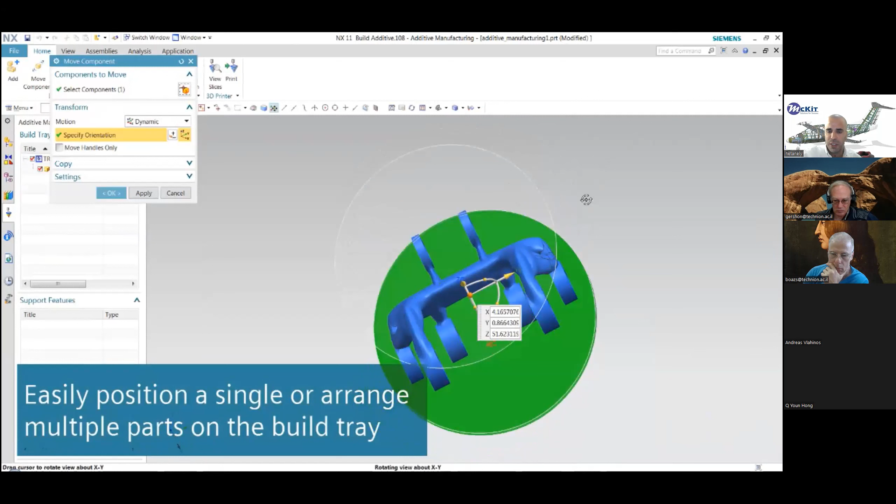We are adding a component. We can reposition it with the work coordinate system. It's dynamic, as you see, by dragging the work coordinate system.

Automatically create support: right click, create support. The system understands it needs to build the support down to the build tray, and how to orient the part on the tray. As you see, we have an offset from the build, and the support is created. Of course, we can change supports after creation if we want, and again, we can do manual creation of supports.

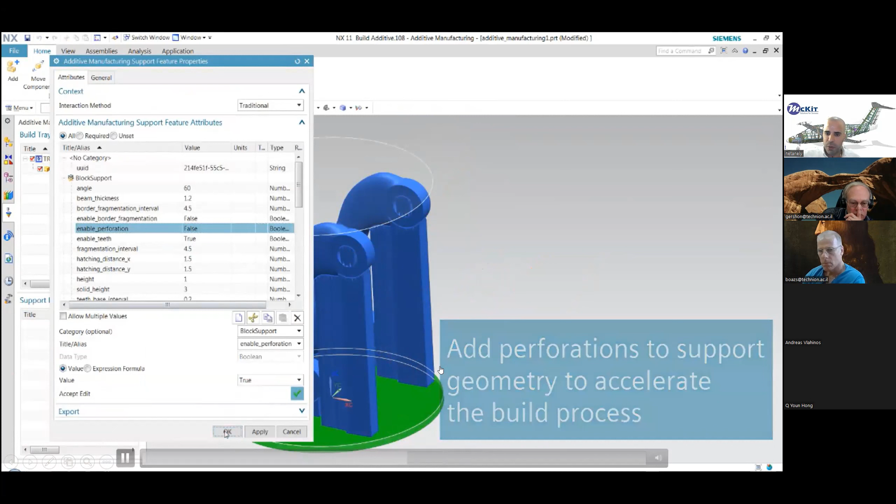For example, here we are doing a block support, and now this is a different support. Here we can do a simple validation within NX, do a section, and review the layers. Here we are calling the build strategy. This part is an example for aluminum.

We can call the slicer. See if we have a problem with the laser, if we have a jump in the laser, if we have any issue on the 2D on each layer. And then print it. In this case, like this. Okay.

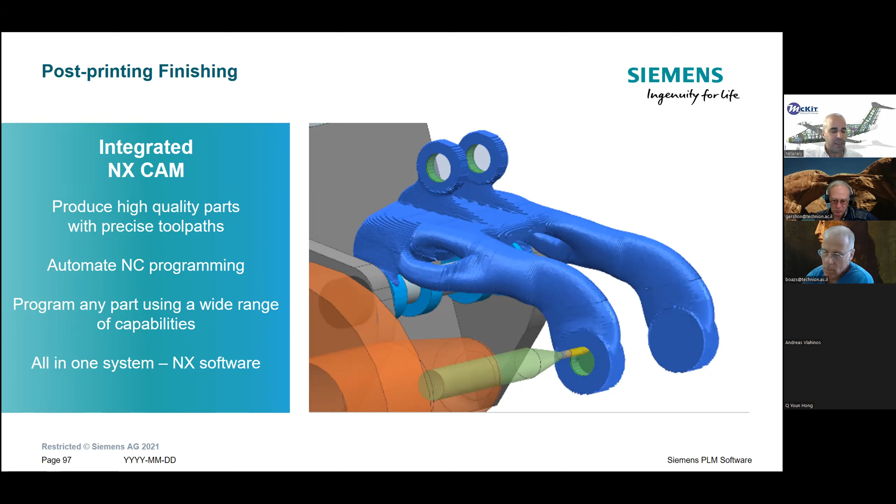The next step is to finish the part. Just to know, I don't think that for you it's important, but we also have inside capabilities in NX called NX-CAM. It's also very huge capabilities to produce CAM operations. For example, after we finish the printing, we want this area to be accurate. So we put it on a milling machine and we're doing this milling. And again, all is in NX. It can be with only one file, one file that has everything inside.

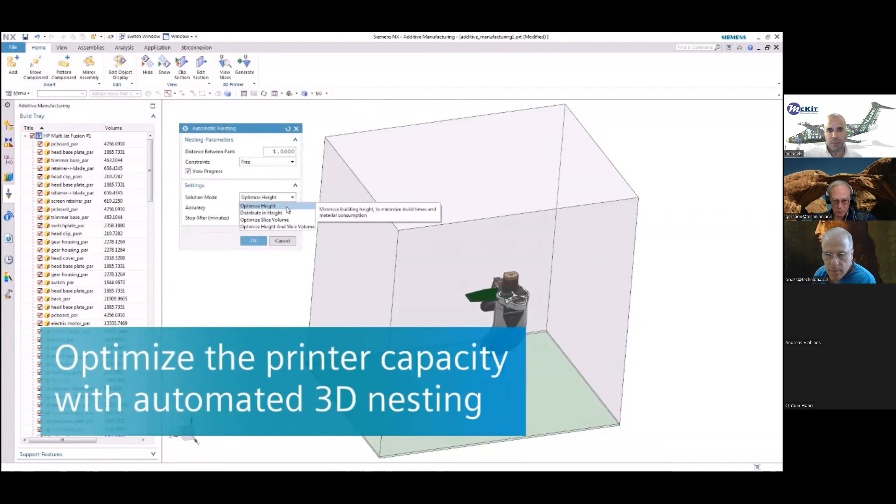Okay, the last, I want to show you another thing. For example, if we are printing in multi-jet fusion, I want you to see here the capabilities of the nesting. For example, we can add the part as you saw before. And now we can tell the system, please do a 3D nesting calculation, optimization with different parameters, optimize the height, please finish after 1 minute.

So we are doing here the calculation. This is real-time computation, what you are seeing here. And that's it. The system gives us the 3D nesting computation. And from here, we are going again with the same process, select, the build, and so on. That's it for my side.

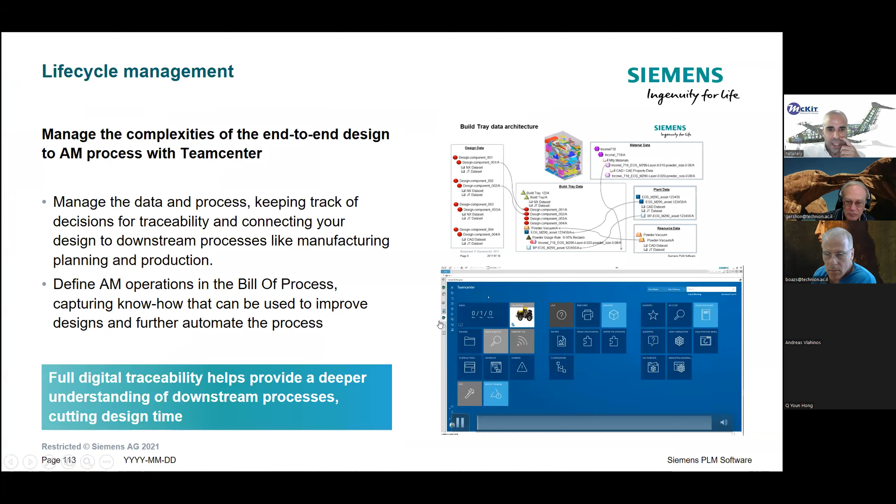Maybe you know what? I want to show you maybe the final thing. It's this. You can see my screen, yes? Gershon, you can see my screen?

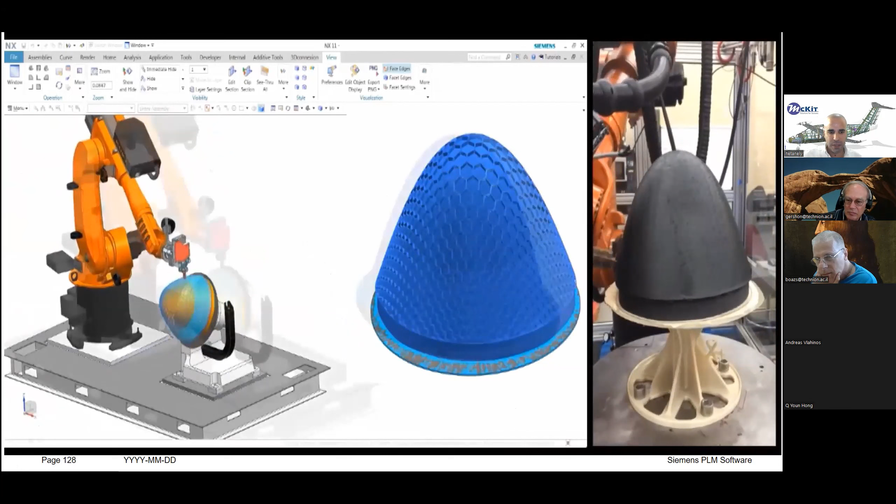Yes, I can. Okay. So I want to show you a part from a composite material that is printing in NX. You can see here it's NX. It's an old version, NX11, but you can see also in NX11 we can print 5-axis composite parts. So let's see it. So the system is building here layer by layer. And if we need to close an area that wasn't closed before, the system can also do it.

Siemens developed on top of NX-CAM. NX-CAM's capabilities have been in the industry for something like, I think, 30 years. And it's very strong capabilities for 5-axis machining, blade machining, turbo machining. And on top of it, Siemens adds capabilities for 5-axis printing, as you saw here. And we can print composite parts. Okay, I think I will end here, Gershon.

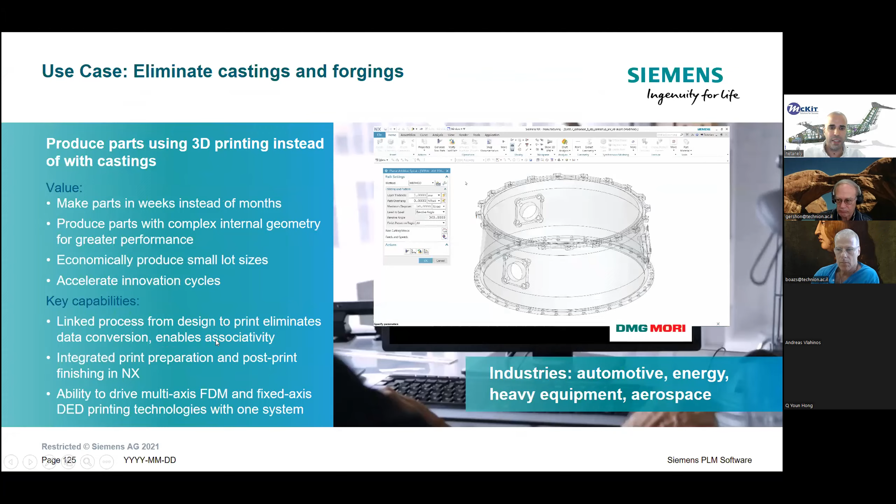Yeah, thank you very much. I think it was very interesting, at least to me. I have some questions, but let's see if there are questions from other people before I start. Okay, if not, maybe I would ask.

I have two questions. One, you showed in the first part of the talk a mouse with some details on top of it. You remember what I'm talking about? Yes, it's called the texture capability, taking the 2D elements and implementing them on the 3D mouse surface. So my question is, the end geometry, is it spline based or polygonal in this case? Polygonal. Okay, that's what I assumed.

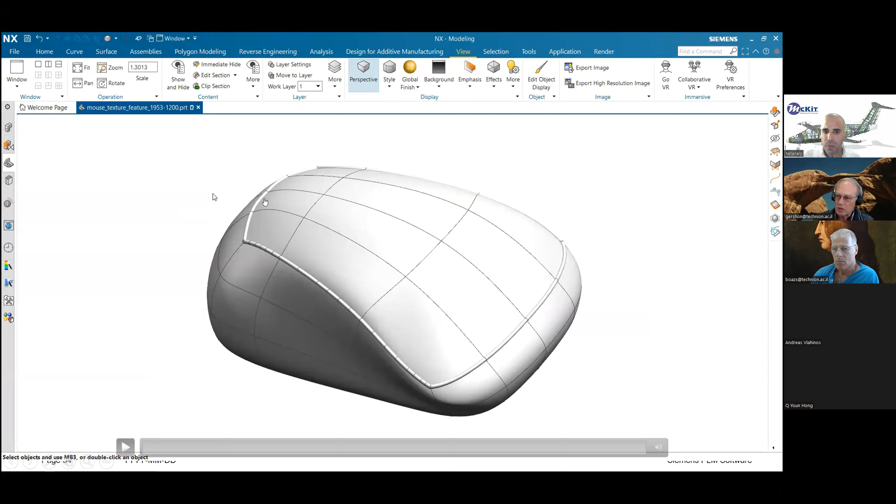Yes, so this can also be controlled by the trap support. We can validate and check if this is a trap support, and we can change the design so we don't have the trap support. Also, we can perform a solid support, not just a block support. The block support is out of the box. It's a sheet body support. But in several use cases, you need to build a solid support, to transfer the heat from area to area. So you also have these capabilities to build a solid support.